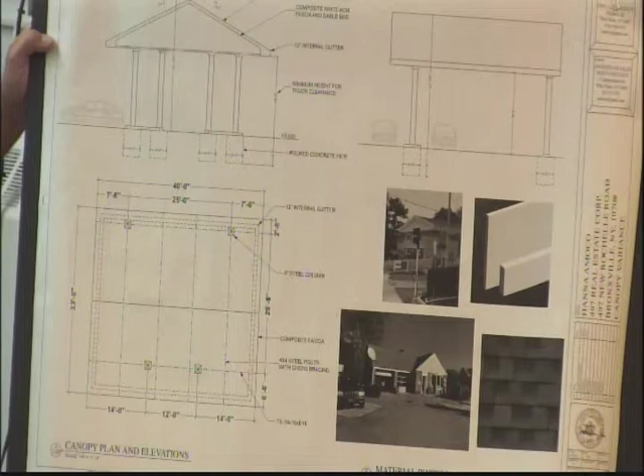Good evening, my name is Jonathan Villani, representing Annunziata Villani Design Consultants, proposing a canopy structure at the 497 New Rochelle Road Amoco Station. Very simple, two materials. I have them in color on the computer. It's asphalt shingle roof with composite white trim around the entire structure, similar to a station further down New Rochelle Road that has a canopy structure with similar materials. The asphalt shingles will match the pewter gray on the existing service station building, so we're staying in vein with the white and gray colors on the existing building.

Any questions here? I believe there's color in your packet, and I also have a computer if you want to look at the colors. In those photos there should be a photo of the other structure a couple of blocks down.

I'm familiar with this, this is actually where I get gas. The objective here is just to give some weather cover. Believe it or not, it's a big selling point because people go to the station with the cover versus the one without it; they'll go down the block instead of coming to this store if it's raining.

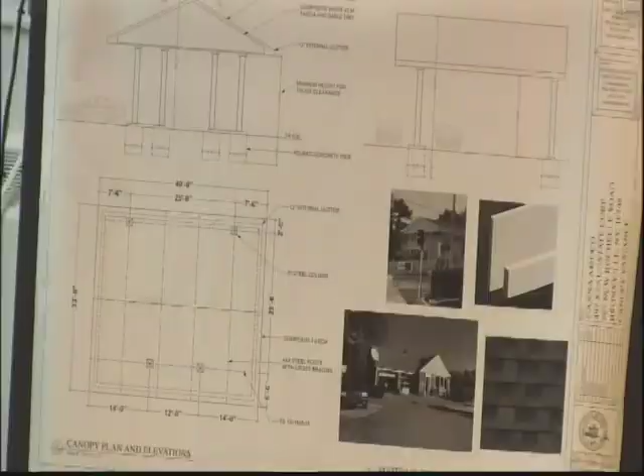Will it have lights inside? It'll have LED lights underneath, as per code, for lighting on the pumps. Does it need an Ansul system or fire protection system? Not anymore, that code is gone, there's no suppression system required under canopies now.

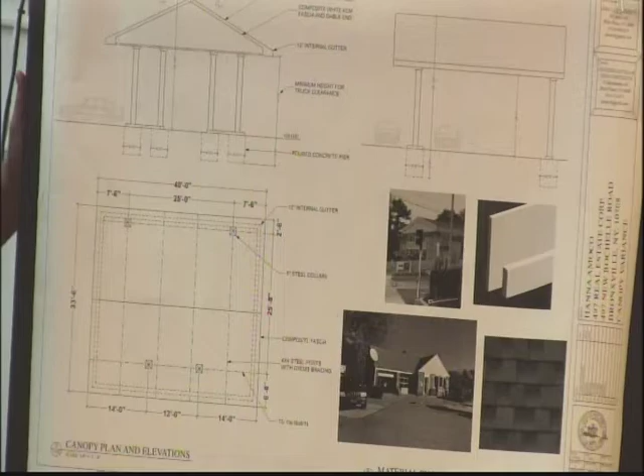And I guess the columns or stanchions, that's not going to be impeding cars pulling in, is it? No. Can you show on the site plan? Yeah, I have a site plan. So the structure is, this is the building, this is the structure out here.

These are the two existing pumps. We're limited on this side of the property due to the property line, so the cars come through here. The columns are actually hugging the building on one side and in between the pumps on the other, so there's actually a lot of clearance, though it's tight on the pedestrian side. But it's going to be out of the pedestrian walkway due to the property line, which ends at the planter, so we're not allowed to protrude past that line.

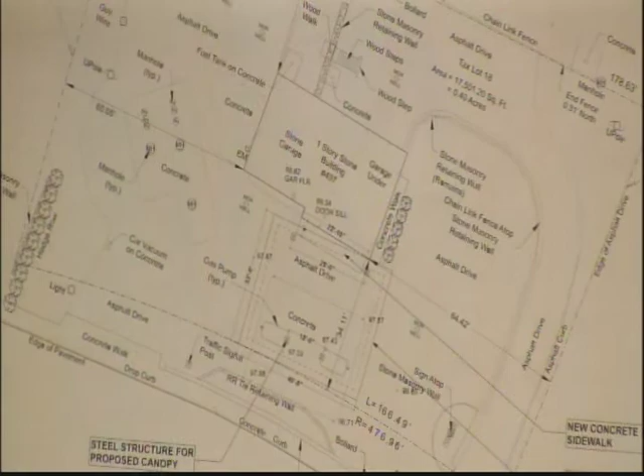So it's a big structure, what's the footprint of this thing again? It is 40 by 33, pretty substantial.

Will there be any signage on there? No signage, they have a separate signage approval for a monument sign on the property, and we don't permit signage on the canopies.

So the top of the ridge in relationship to the ridge line on the existing structure, does it exceed the existing ridge? Not by much, maybe a foot or two, but they're separated, not connected. The gable is actually going perpendicular to this gable, parallel to that gable.

Obviously the reason for the height is the minimum 14.6 clearance underneath needed for trucks, deliveries and fuel. So the pitch we left at a 5, because if you use asphalt shingles to create a residential look, you don't want to go below a 4 pitch, since shingles tend to deteriorate when the pitch is lower, and you'd have to switch to a flat roof.

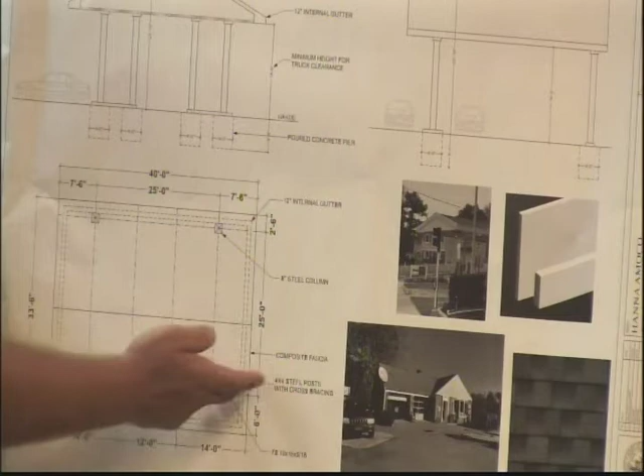And the placement of the columns, obviously, they're more spread on the ones closer to the existing structure, and yes, these ones too, on the front. Because there really is no place to put them elsewhere, since the cars and pedestrians walk here. So we hug the building with these 2 columns, and these 2 stand in between the existing pumps.

So there's actually no impeding the car traffic. Do the front ones need footings? They all need footings, yeah.

So how's that going to work, is there any concern regarding the tanks? No, I've done it on several occasions, I've also built these stations. You do a lot of hand digging, you don't really dig with a machine, you dig around the existing, and you slide them over so the footing is really a square that comes right next to the pump.

How long does something like this take, and is the station out of commission? Well, the longest wait is for the canopy. It takes about 8 weeks for the canopy, but once it gets there, everything will be prepped within a week, and then they erect it within a week. Believe me, my client doesn't want to be down for more than 2 or 3 weeks.

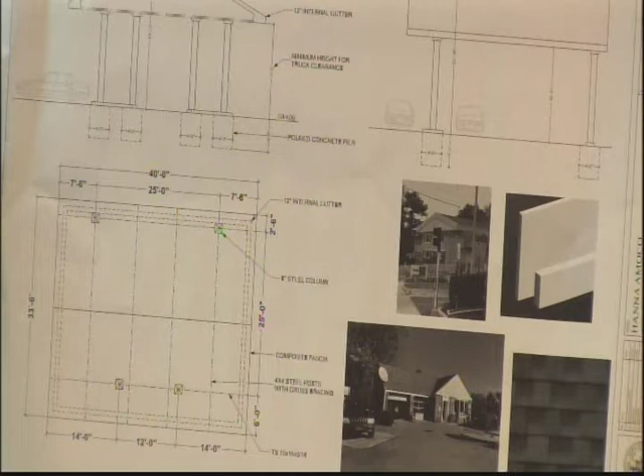Is there any sort of stormwater management, like leaders? Well, it's a totally impervious property already, so they have existing drainage on the property, and the leaders will lead to that existing drainage. Are they on this drawing? Not on the sections. They were on my construction documents, but not these 2 pages.

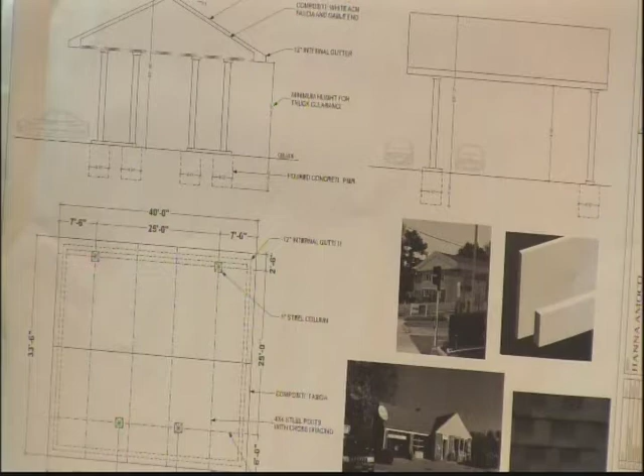Usually we do them internally, and they pop out to the bottom of the columns, so you don't see them. Well, it's probably not very good if they pop out the bottom of the columns on the pump side, right? No, they're diverted away from the pumps and the actual concrete pad because they don't want any icing.

I don't see them on these construction drawings. I could present that. I just think you want to address that when you present to the planning board.

Not a problem. I have one quick question too - I thought the code requirement was 13 feet 6 inches at the lowest. You sure it's 14'6"? Yes, every pump installer, canopy installer, uses 14'6" due to the fueling truck coming underneath. I'll double check it, but believe me, I've done it.

I know you want enough clearance, but if you could lower the height. I could check, but I don't think 13'6" is going to make it with the canopy structure people I've spoken to, and the new trucks and all that. So I have to just make sure.

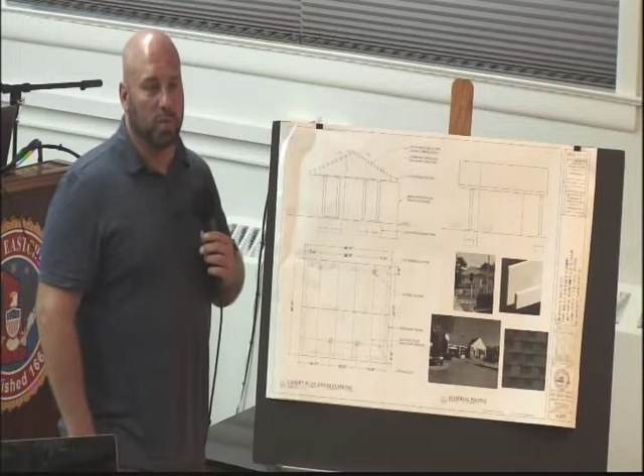You did submit some pictures of the adjacent properties, one being the Mobil station down on the other diagonal corner, right? Correct, that's just for reference. We're staying in the same vein as that. Is the pitch on your asphalt shingle similar, or is theirs a canopy? Theirs is shallower, but I was thinking, they're going to have to replace their roof within 5 to 10 years. But it won't match this.

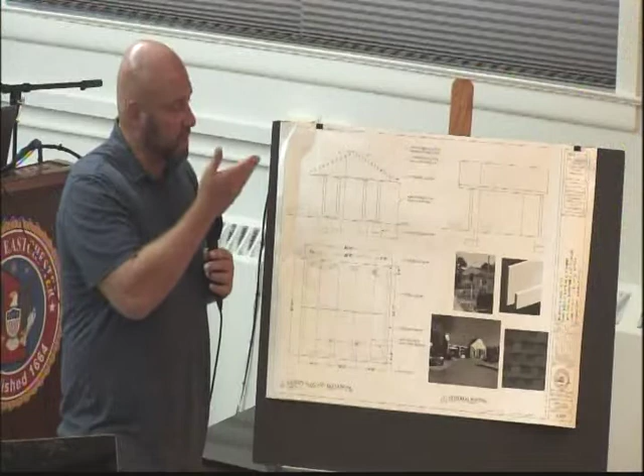Is the difference, that 1 or 2 foot difference in pitch, just a maintenance issue? Because the ridge line on the current dwelling, this thing's gonna exceed that by - no, we're willing to change the pitch to a 4. I could maybe get away with a 3, but I don't want to go to a 2 or a 1 because that's where it gets flat.

No, we're not suggesting that, we're just asking, what's the height of the ridge on the existing structure in relationship to the height of the ridge on the new one, and you answered it's a foot or 2 higher on the new one. Correct, the ridge on the existing is probably 19 to 20 feet tall. How high is the new one? 23. So it's like a 4-foot difference.

You could just scale it by the door. If the door's 7 feet, it's about 19 feet.

There's not a lot of architectural review associated with this particular application. However, I think we want to try and be as mindful as we can to make sure it's not out of scale, it's not domineering the existing structure, and there's some degree of symmetry in terms of scale and height between the existing and new building. So, do you think that's something, Sylvia, that...

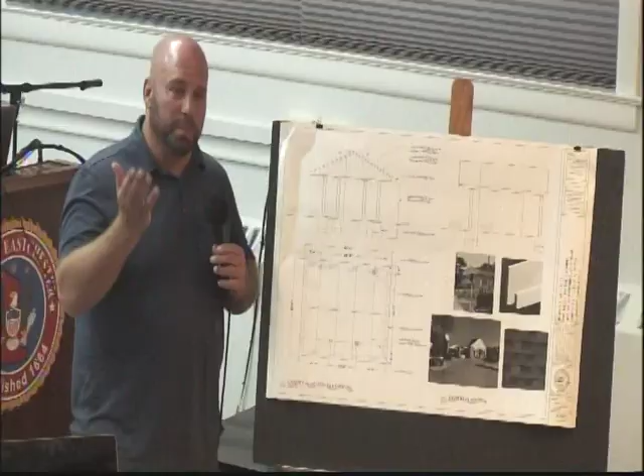I know changing the pitch to 4:12 is definitely going to help, it's going to lower that roof. What I can do is measure the ridge - it definitely has to be asphalt - there's an elevation difference also coming out to the pad. I can measure the ridge to the existing building, drag it across, and see what pitch that gives me.

Are they always asphalt shingle roofs? Is that the look factor, the look they're trying to go for, because in this area it doesn't really fit to put one of those canopies with fascia boards and then put signage on it. So the notice is that if you do a fascia board around the canopy, the actual supplier wants you to put signage on the fascia board. So when you do a canopy structure like this, you can't put signage on it. I think that was always the intention, not to put signage on the actual canopy.

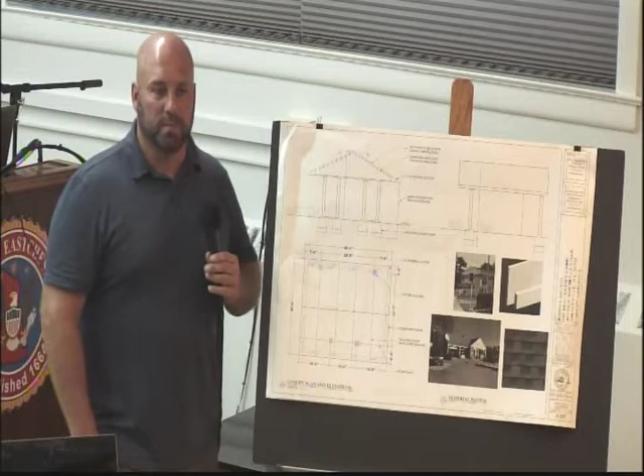I think just the general concern is that we want it to look like it fits in, and it's not an afterthought where you have this oversized, imposing structure that looks like it was an afterthought, imposing on the other building which has some degree of character—it's not this gargantuan service station. I kind of think if it was brought down a little bit, it may look more in keeping with what's there.

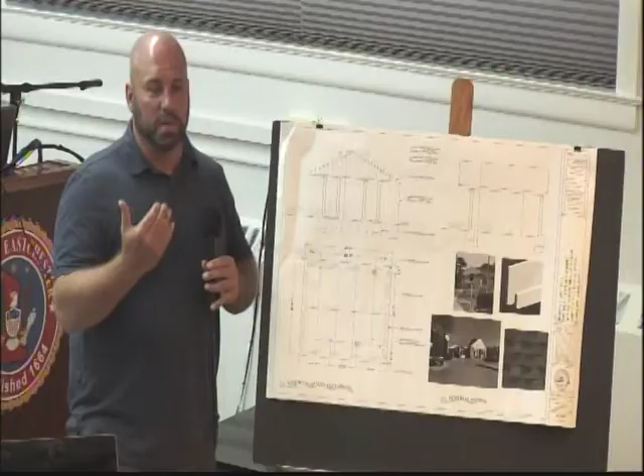Not a problem. The only restriction—like I said, I'll double check with the installers, but I'll check the height underneath. I'm pretty sure it's 14'6" clearance, and then I can match the ridge line and see where that pitch brings me to match the ridge line of the existing.

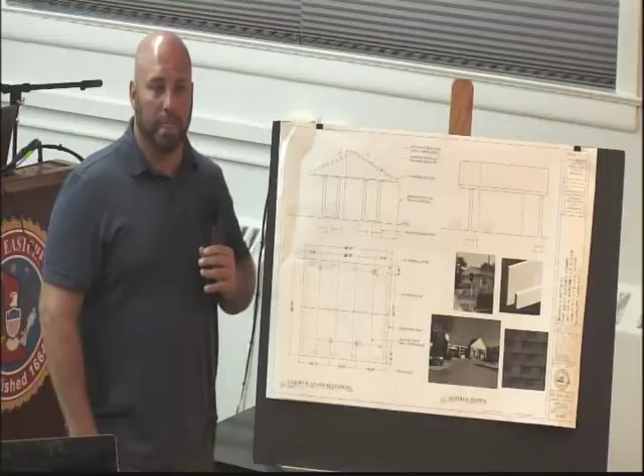Okay, you satisfied with that? Okay, all right, want to open it up and see?

I make a motion to open the public hearing on application 22-15, Amico Station. Second. Aye.

Anybody here would like to speak? Any comments? None?

I make a motion to close the public hearing on application 22-15, Amico Station. Second.

So that motion—I make a motion to refer application 22-15, Amico Station, to the planning board with a recommendation to approve as submitted with the new ridge line. So I'll read what the conditions were: when you appear before the planning board, show the leaders on the elevations and address drainage from the leaders; check the code requirement with regard to the minimum required clearance height; clarify what the height to the ridge of the existing structure is compared to the height of the proposed canopy; and consider changing the pitch, potentially to 4-12, to lower it.

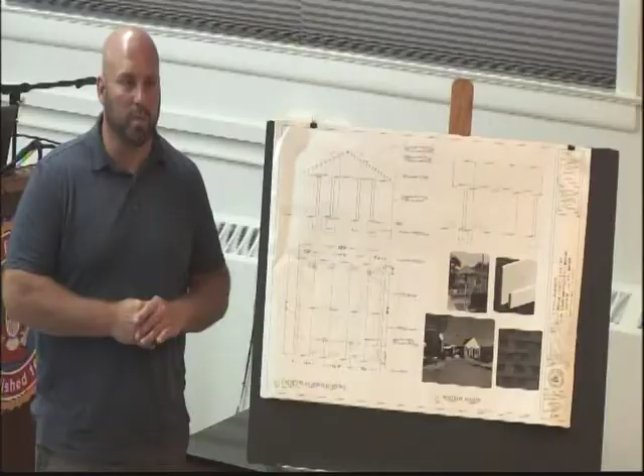Absolutely, not a problem. Okay, all right, thank you. Good luck.

Our next item of new business is item number 2, 22-31, White Plains Hospital at 750 White Plains Road.

They're going to be presenting—think I'm hooked up. Oh, smaller drawings. Okay, yes. Yeah, it's mine. There you go. It's up on the screen. I'm very bad with the microphone, so if I'm too loud or too soft, you'll let me know. You're fine so far.

Shall I start? Sure. My name is Jim Case. I'm a principal with CannonDesign Architecture, and with me is Daniel Schmidt, a project architect with our firm. We've been retained by White Plains Hospital to design an ambulatory outpatient facility at what was the Lord and Taylor building in Eastchester. We submitted a bunch of drawings which you probably have copies of, more than you need, so I'll focus on what I think you want to see, but stop me if you want me to talk about something else.

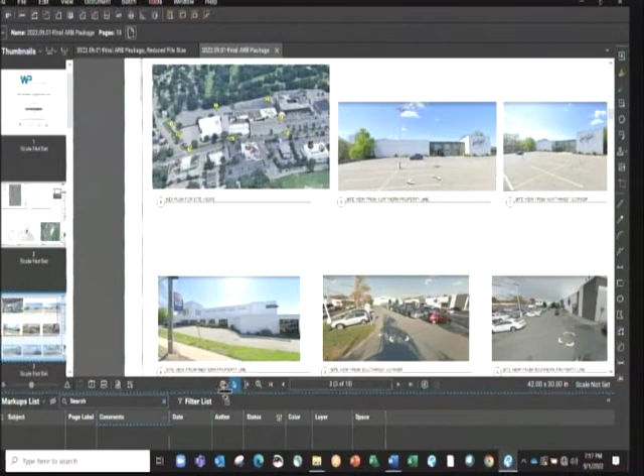Okay, so I'm going to skip over to here and zoom in, just to orient everybody. This is the portion of the building we're talking about, and this is the north entrance here that exists today, and there's an east entrance on the lower parking lot. There are two parking lots—this one is higher, and this one over here, if you can see my pointer, is lower.

Our space is approximately 50,000 square feet on the main level here, which is accessed directly off of this higher parking lot. We'll also have access from a vestibule on the lower parking lot, which will have a stair and elevator that will take patients up to the main level.

Now I'm going to show you the main—there are really three interventions to the facade of this building that are taking place. One, the landlord is already in process of doing under a separate application—he's adding some windows to the facade of the building, you've probably seen that. The two that we're doing are at the entrance here at the north—maybe this arrow looks better here—and at the vestibule on the east side. I'll home in on that for a second.

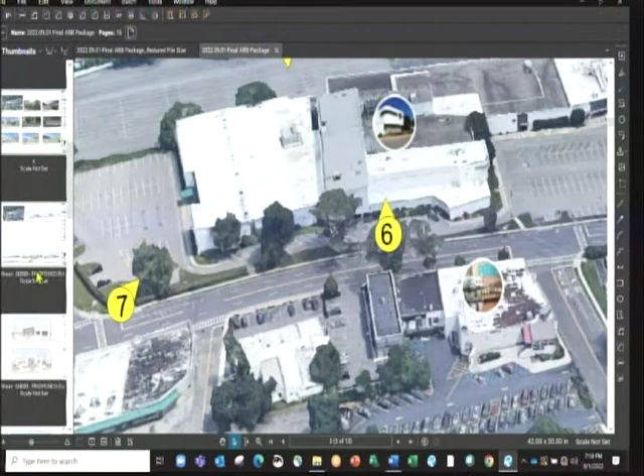Give me a second. Sorry, I wanted to show you one more thing on this drawing.

This is the north entrance off the higher parking lot as it exists today. We're proposing to remove the stone and glass and replace it with new glass in the exact same plane as what's there now. We're not changing the footprint or increasing the size of the building, just replacing it with more glass since this will be our main entrance and access to waiting areas, to get more natural light into the space.

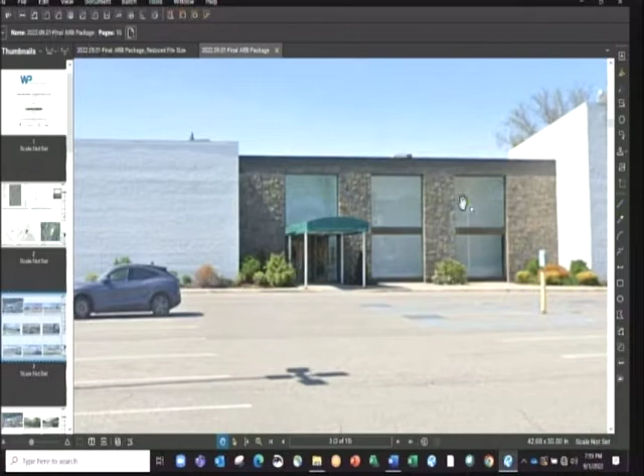We're also going to add a kind of crisp canopy to this, which I'll show you a rendering of in a minute, that will go to the same height as this part of the building, not the higher part, but the main part.

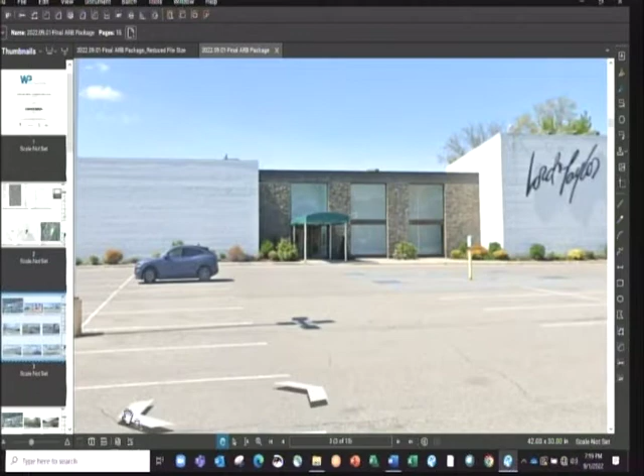The other entrance, the vestibule, can be seen in this photograph. There's an existing vestibule on the lower parking lot on the east side. It's a little blurry here, but it's a glass vestibule with a flat roof right here. We're proposing to take that down and put in a new taller vestibule in the same location, same footprint, not expanding the building's footprint, but giving it more height so we can add a sort of monumental decorative stair on the inside to go up to the main level, plus an elevator.

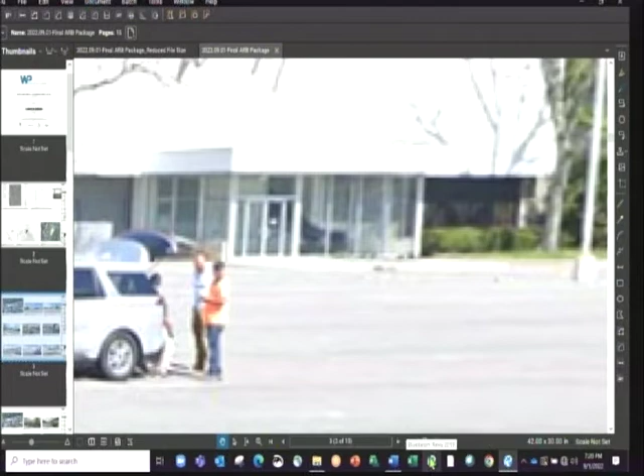There are escalators there now that we're going to remove and close up, putting in an elevator instead for patient access to the main floor. So let me show you what those will look like, we think.

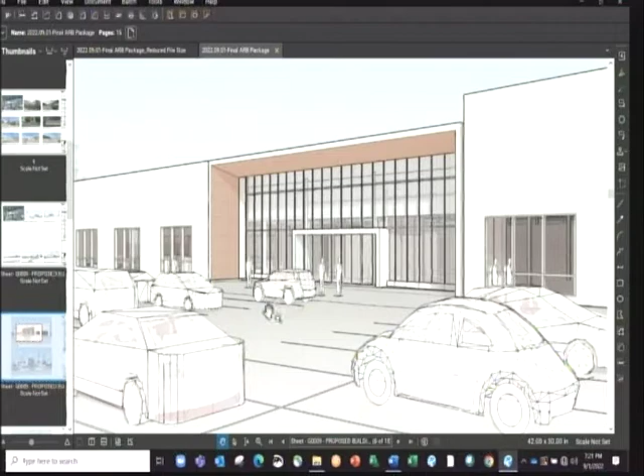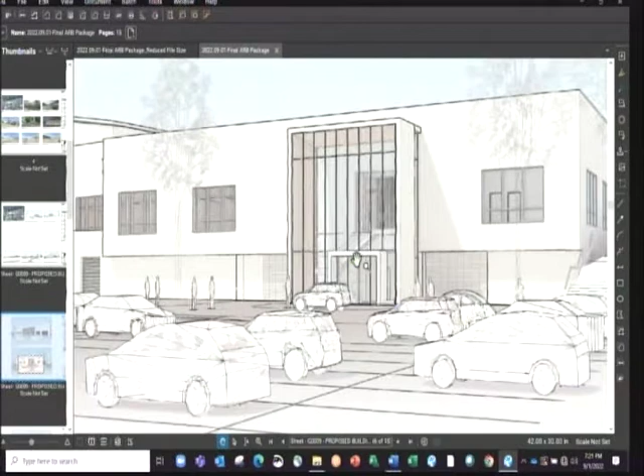Inside, we're going to have that same wood-like material, but it'll be within the structure, not on the outside like it is at the other entrance.

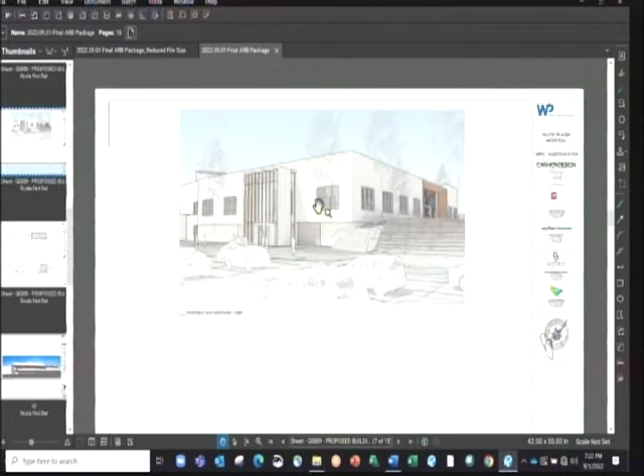This next rendering shows both of the entrances from one angle, the taller vestibule and the canopy piece we're doing at the other entrance. There's a stairway being put in that doesn't exist now, by the landlord—that's not part of our work.

Any questions so far? How will it be illuminated—from the inside? The parking lot itself will have illumination like it has now, and we're not involved in that part; that would be the landlord. We haven't, to be honest, finished designing the lighting for this, so your feedback is perfect timing. At other hospital and outpatient projects, we've sometimes used dimmable LED lighting so it can be adjusted if there's an issue. We haven't designed it yet, but it'll be lit from the inside. There will be lights, we think, in this canopy on the outside to illuminate the area immediately below, but not illuminating out to neighbors.

My next question is about signage.

I knew you were going to ask that, because there's no signage shown right now, and that's for a reason - it hasn't been designed yet. We understand that's a separate application, so at a separate point, the hospital will come in with the signage they're proposing, and that'll be discussed. I'm sure there'll be some signage on the outside of the building, but how large and what kind, we haven't gone there yet.

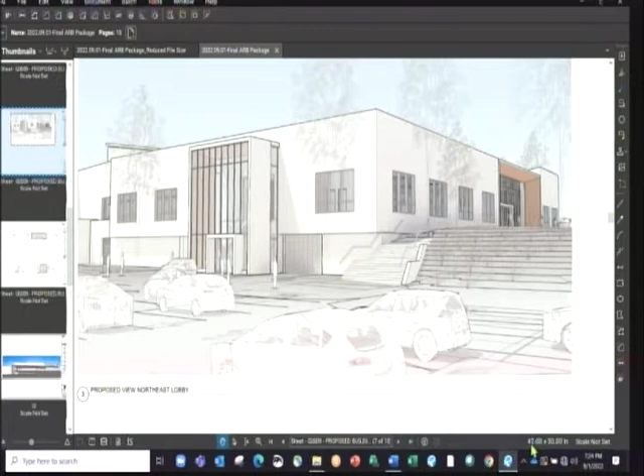Any other questions? I had a question I mentioned previously about roof-mounted equipment. There is a roof-mounted unit now that exists that's going to be removed, possibly - we may reuse it, we may not. Up until recently, we were proposing 3 new additional units on the roof, air handling units, to handle the airflow and filtration we need for a medical space.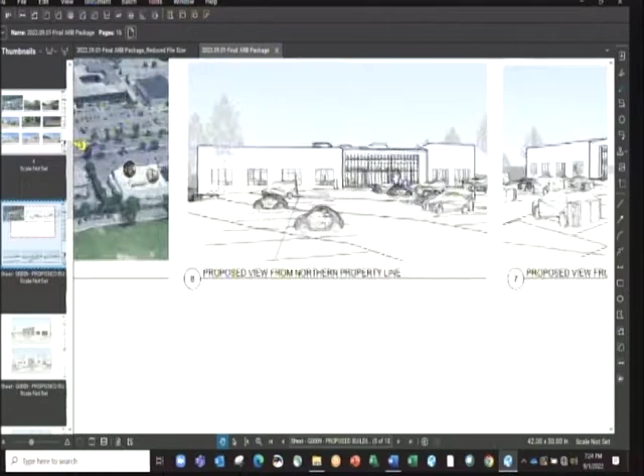We've done a couple of drawings to see what the impact of those would be visually. They're in the set that you have - let me find it for you. From a few views, you can see the 3 new units poking up a little bit, like in this view. From other views, you can't because it's blocked by the perspective and where you're standing. So in this view you don't really see them, but on this more head-on view, closer in, you do.

Now those units are up on dunnage, so they're high. We're looking now to use 4 units that are smaller, on curbs, which will, if not completely eliminate, certainly reduce this down to near zero what you would see from most angles.

Does the building have a parapet right now? It has a partial parapet. That right side of the building we're looking at over here has a fairly high parapet, then there's gravel stops right where our entrance is going to be, and then to the left of that there's like 6-inch curbs, so it's kind of up and down with the height of what's happening.

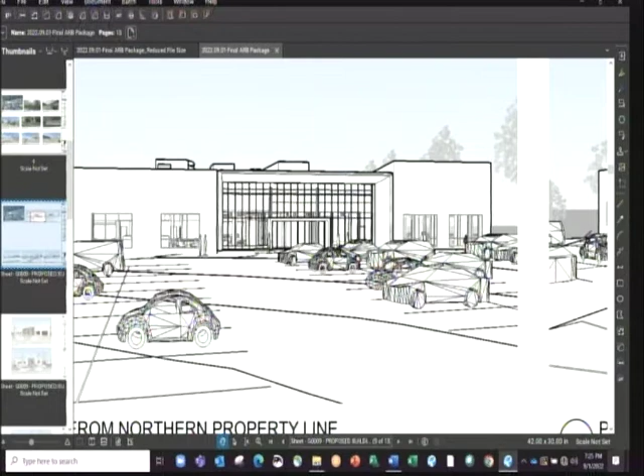Unfortunately, we need to have rooftop units for air handling, but we've moved them back as far as we can, so you will see them in some views and not in others, from what we've drawn here, and they're on your drawings as well. We're looking at possibly hiding one of them behind that higher parapet area, which is over 5 feet - so over here you see a little bit as well.

And you won't need any kind of additional bump out on the roof for the new elevator, right? That's perfectly within - it's going to be enclosed with it. It's a small, it's only a 2-stop elevator, and our height is so high, we have very high ceilings, so that's going to be within the space.

What do you think? Straightforward.

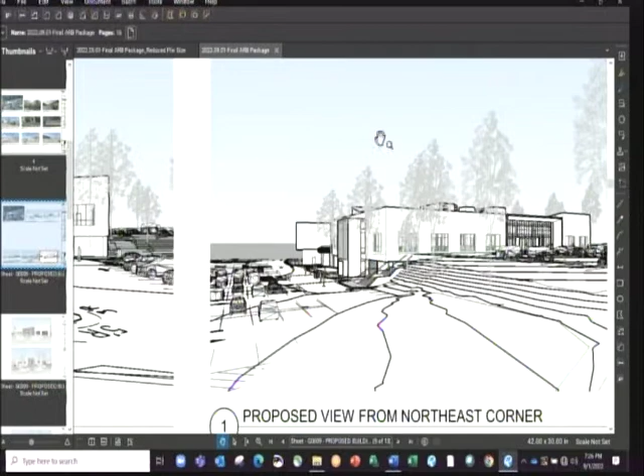We do have some materials if you'd like to see. Sure, we'd like to see that. Put this one back.

The base building windows have black mullions, so we're going to match that with a curtain wall - this is just a matte black. On the east side we have clear glass, which is nice. On the north side, we're going to white dot frit it 30%, just to hide some structure you can possibly see through the curtain wall since it's a certain height, and also for possible sun shading. This is just an example, like this one is a little bit more dense than 30%.

And our white metal panel for the outside - that's just for color, correct? The white metal panel, that's going where - that's the outside of the frame. Oh, the frame, yeah, right.

Will the frame be aluminum like this? We're going to do an ACM panel, or like a flat plate, to avoid some insulation issues, but it's going to be an aluminum panel. It's going to be a little bit thicker than that - the gauge here is not accurate. If a kid, like my son, throws a baseball at this, it's going to be... And this is the wood? The wood look, yeah - most likely keep your son away from our building.

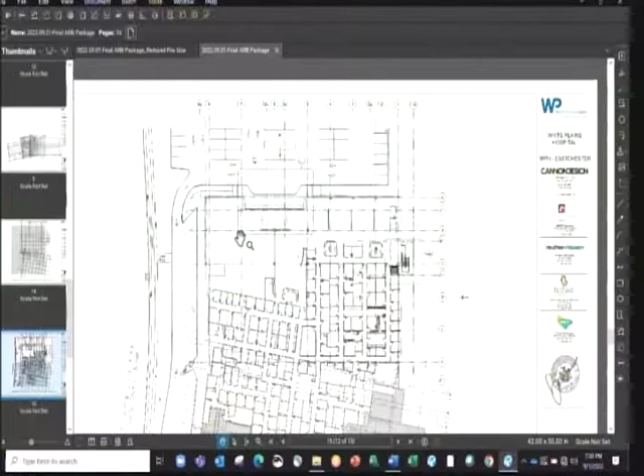I just have one question on the interior layout. I saw one drawing that was just a mass of, I guess, examination rooms. Is that right? Let me explain that - it's interesting, actually, because it's something that's talked about a lot. Let me see if I have that. You're talking about this drawing here, I think, which is in your set.

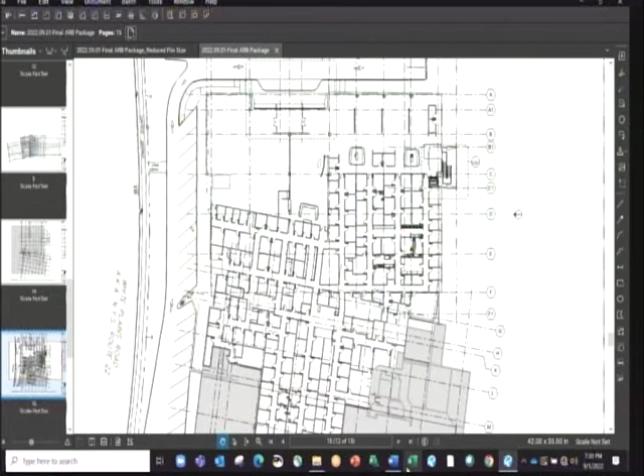This is the lobby - the shape of the lobby is changing as we're still working out the interior layout. But there are a number of specialty practices moving in here: dermatology, allergy, orthopedics - about 8 or 9 different specialties. Each one will have a grouping or number of exam rooms they need for their practice.

But on some days there'll be more of one, less of another, so they're going to flex. So the idea is to build a flexible grid of exam rooms and corridors connecting them so the hospital's program can flex and change over time. The basic module - in this case the exam room - is designed to adapt and service almost any of these specialties. A few are slightly different because of equipment needs, but most can serve any specialty.

So there'll be more than one check-in area when you walk in. You won't be walking into one big space - you'll walk to a reception, check-in, and then be directed to where you need to go in the facility. It's still being worked out because the specialties are still a bit in flux. So it looks on paper like a lot of stuff, and it is, but it's going to be operationally and organizationally pretty well thought out, hopefully running smoothly.

And the idea operationally is to minimize the amount of waiting time patients have. Part of that is a function of the quantity of rooms you have and the ability to keep people moving.

So I guess as part of that design, you need to know what the usage is, and again, looking at the density of office space - does that dictate the amount of additional tonnage of AC that's required? Is that driving the larger scale air conditioning requirement, i.e. the bigger unit on the roof?

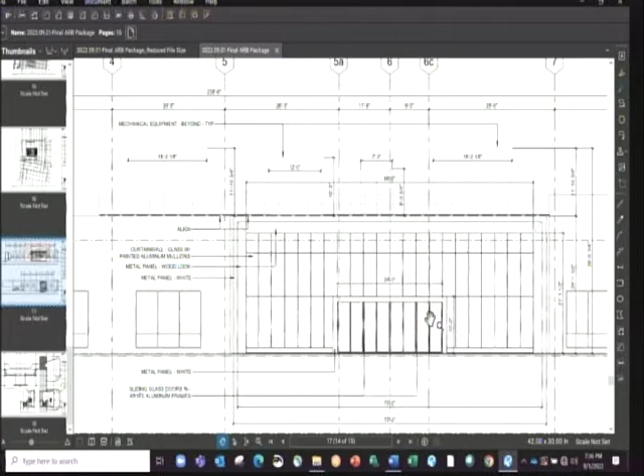We do have dimensions of the units as they were several weeks ago, but they're coming down in height from what we're showing here. The drawings I showed you before, with the perspectives where you see them poking up, were based on this set of units. We're bringing this down. I don't have the exact size yet of the smaller units and on curbs. These are larger units up on roof dunnage, tonnage, so it will be less than this.

I don't have the exact dimensions yet because it's still being designed. The information in terms of what was submitted with these drawings is here regarding the sizes, but we're in process of lowering that—not out of any commentary, just out of a desire to be more flexible with the units.

It's a little fluid, but I can tell you that because we do a lot of healthcare work, we're aware that the lower we can keep these and the further back, the less impact, and that's what we're trying to do. It will be better than what we're showing here.

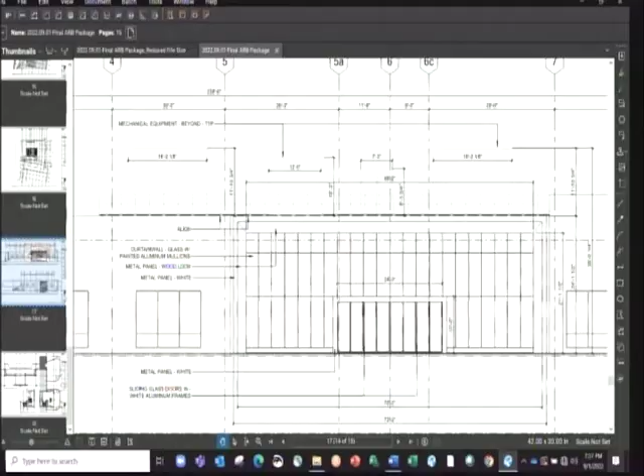I'm going to make a motion to open the public hearing on application 22-31, White Plains Hospital. Is there anyone here with questions? No? Okay.

I make a motion to close the public hearing on application 22-31, White Plains Hospital. Second.

I make a motion to refer application 22-31, White Plains Hospital to the planning board. I think the one or two conditions or comments were what we just spoke about: providing more specific information regarding the roof-mounted equipment and trying to minimize views of those to the maximum extent possible. The planning board will be concerned about that as well. Also, to reiterate what I already discussed with the applicant, we should minimize the impact of any proposed lighting within those entranceways.

Great, thank you. Very good. Good luck. Thanks.

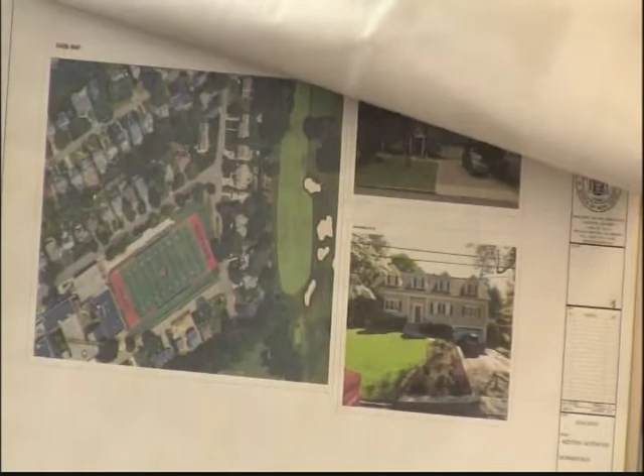We also included a slew of additional renders for tonight that are larger to look at. Jada, would you help me? I don't have enough hands.

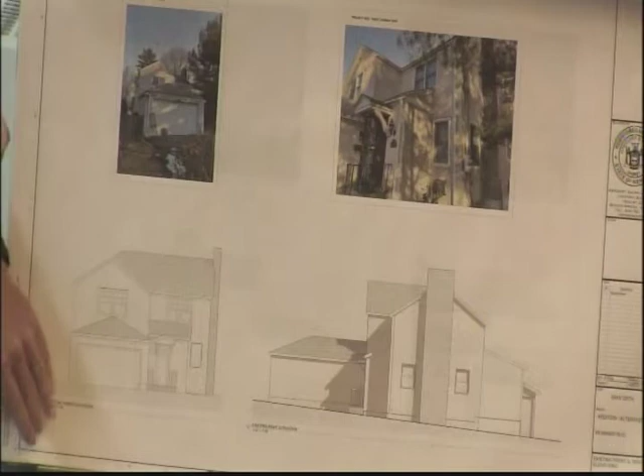Okay, so existing two-story dwelling there. It's stucco finish pretty much all around, with an asphalt shingle roof. You can see from the photographs we submitted that it's not in the best of repair and maintenance throughout. The primary dominant feature on the existing facade is this two-car garage door and that hip roof elevation, with the actual architecture kind of tucked back from it. The entry itself is also, as you see in this photograph, kind of obscured from view as you come down the road. On the rear, which isn't the primary focus but is still relevant, we refer to it in the application materials as somewhat of an orphaned addition and space on the back.

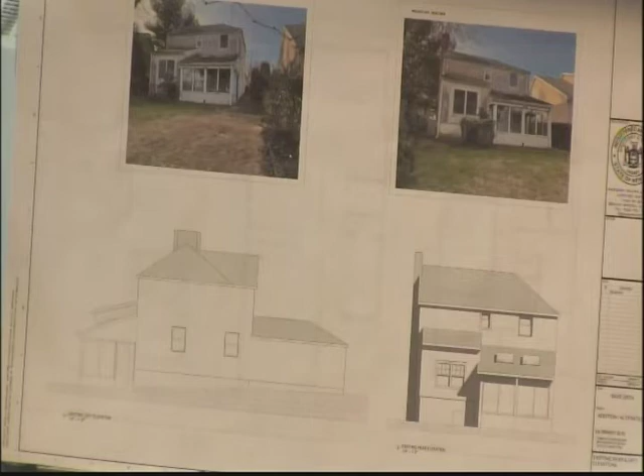So the task we received, in addition to the plans, was to help reconcile the massing of the home, make it make sense, introduce some order and symmetry to it, and improve the streetscape. If we go to the elevation page, this is ARB-1.

Mr. Orth is a general fan of that farmhouse or modern farmhouse style. So we pulled forward the second floor over the garage, and we would propose swapping out the garage door to something that has a little more scale to it—more human scale, more pedestrian—instead of just that very plain overhead door. More attractive there, and then working pretty hard to define three axes: a vertical axis with the garage door and double windows in the bedroom above with a secondary ridgeline; an axis at the center of the home with the primary ridgeline; and an axis for the new porch we pulled forward, with another bedroom above with double windows. We also expand and maintain a chimney element massing on the side of the dwelling. That's about it on the front.

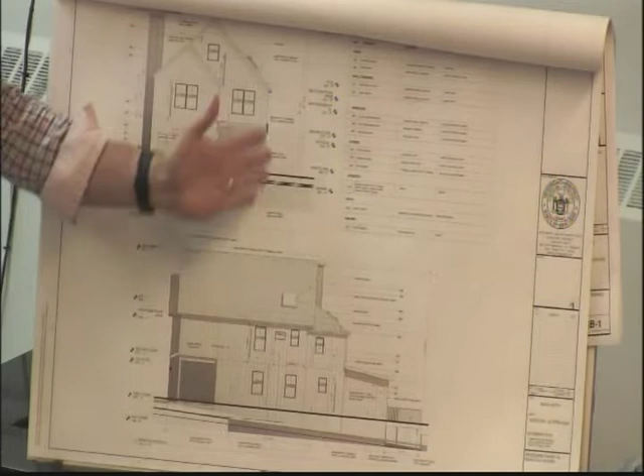I won't go around unless you'd like. We'd like to, yes—go around the sides? Okay. So on the side elevations, generally we're trying to maintain a series of order, reconciling the lines of the home as we go. This is the inset of the porch that leads to the entryway.

And then the rear of the home was quite reconciled from the existing condition. We squared off that massing on the rear with a one-story roof, and then you have the second floor above it, which then steps back to the attic that is up above with that primary roof line. There is a deck that we're proposing on the rear.

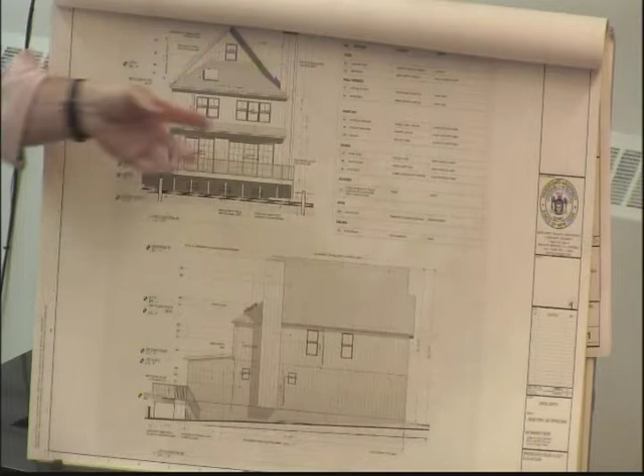This sheet has the list of materials, which I'll talk about in the elevations. Generally speaking, it's a lot of more maintenance-free materials, with Hardie cement board and batten wrapping the house, redone stucco around the foundation that would match color, and we're proposing asphalt shingle roof all around on the roof lines. The decking itself would be a maintenance-free Trex or other style deck material.

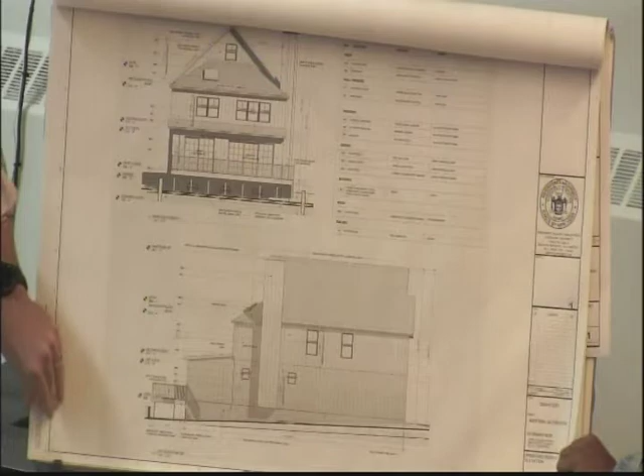And then the other side elevation is, again, just relatively reconciled massing, with some limited windows based on programmatic elements on the interior. And then we modified the renderings a bit from what you had and just made them larger for visibility.

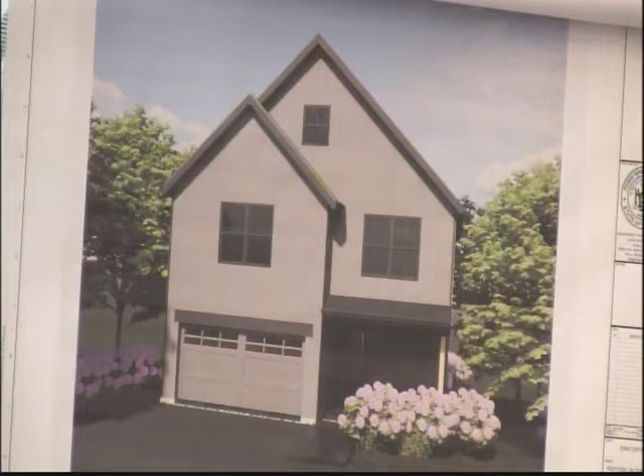The real change was just to try to show it with less shadow. I know the ones we submitted were a little bit dark, and that wasn't exactly doing justice to the intended color, which is like a charcoal. When it's in the sun, I think the renders you had read a little bit brown and really washed out.

So general color palette would be that charcoal for the siding. The trim and the windows would be black. The asphalt shingle would be black.

And then we've been playing with cedar accents. Even in preparation for this, we were looking at other places to incorporate that cedar accent, whether that's the header over the garage door or headers over the windows. We were just thinking about ways to bring a little bit more warmth into the elevation with that cedar element. But again, generally speaking, it's charcoal and black.

And the window series currently we have specified as Marvin, which is a pretty solid, well-known brand.

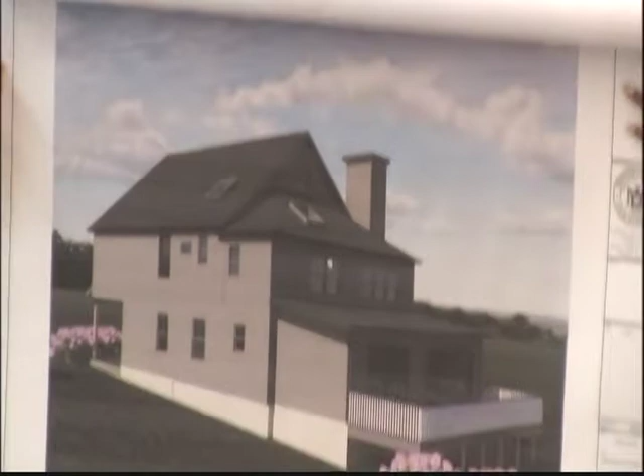Do you have any material samples? Unfortunately, we did not bring any materials. It's a vertical board and batten. What's Hardie? It's a vertical Hardie board and batten, correct.

You really don't read it in the rendering. You would definitely see the shadow lines in person though. That's fair. Every, whatever, 12 inches, 18 inches? It's about 12 to 18 inches, correct. I think we're going a little wider with the 18 inch, but yes.

So these are similar views to what you have in your packet, they're just enlarged. Your asphalt roof in the back, the pitch is way too shallow for asphalt shingle. This roof? It's like a 2-12 maybe. Yeah, I have the roof plan because I knew the pitches would come up.

That's not even a 3 for sure. Do you have enough room to raise the back under the window? Yeah, we do. I was looking at the window lines here, let me just look at it.

A lot of people, when they have limited pitch, they'll do a standing seam instead. I don't know how you feel about it, changing the material there. Most farmhouse-style homes that are built are getting standing seam everywhere, they all have standing seam.

We've been working on this for a while, so I've sort of forgotten some of the elements, but that was a focus area in like February, March, to make sure that the pitch was okay for asphalt. I understand your concern, I agree with it, but this was a focus item before, and I don't have an issue with it, we have the room to raise it anyway.

I think the question is the standing seam metal roof, we could do it, it's just going to cost more money. We have standing seam in the front, on the front porch. On the front porch? Also, this is a house for me, but I am a builder, part-time builder on the side.

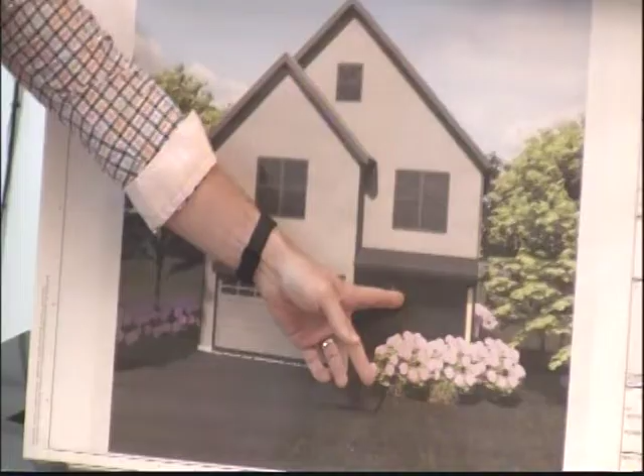That roof over the entryway is a standing seam roof? This roof would be a standing seam roof, yes. I misspoke before, and I don't see any leaders on the rendering.

Are they there? Yes, there's actually a relatively extensive Cultec system that we went through engineering with, for both the roof leaders and the footing drains, all feeding into Cultec.

The garage door is what material? The garage door, what material? Do you know the brand? Aluminum?

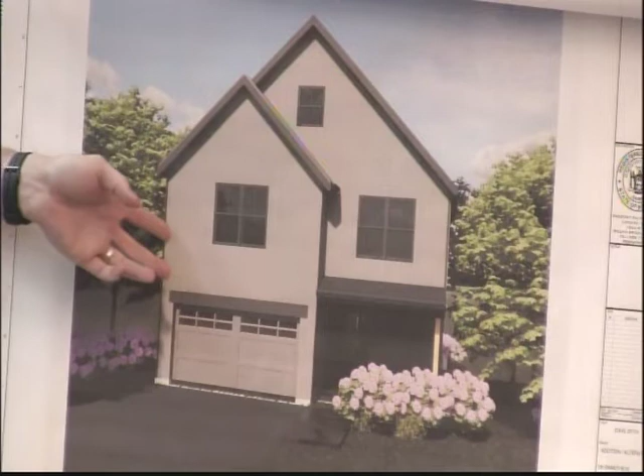I think your point is well taken, that if we're referred to the planning board, we would add the shadow line to the renders and add some of those accents, just to clarify. It's going to read, the house is going to read vertical. It'll help it to read vertical once you do the shadow line.

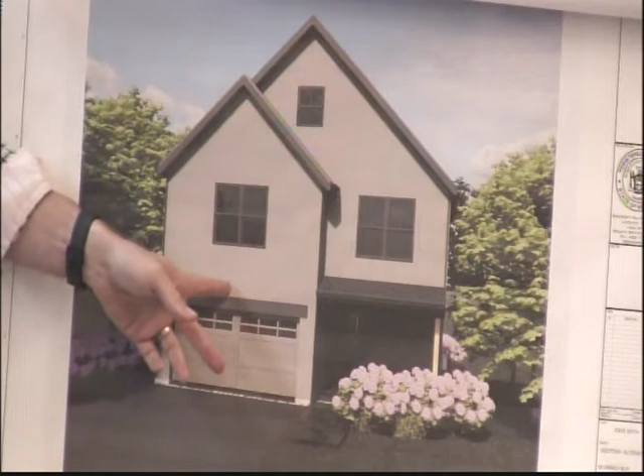I'm just looking where the lights are going to be, underneath in the entryway, and will you have anything on the garage? We had proposed one central carriage-style fixture here, which similarly I can have an actual cut sheet for the planning board.

Not the board, not the board? In the drawing we have, we had shown the batten width style of trim, just to keep everything very clean, even the corners. I'm just going by your elevation. What's that? The elevation doesn't show any trim around the window, it shows the roof over the porch to be asphalt, not standing seam.

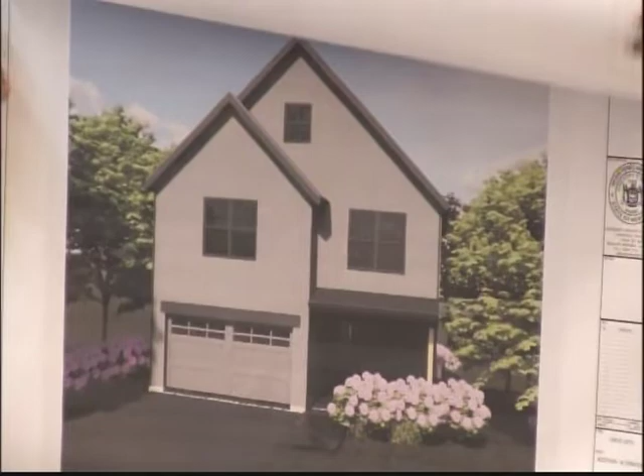The actual elevation drawing, right? Are you doing simulated divided light on the windows? Sorry, what's that? The SDLs? It's SDLs, gonna be a grill inside and outside, not a—correct.

I do have questions about the front entryway again. It's going to be an asphalt driveway, and it looks like you have a little pathway to your entrance. What material will that be? That's gonna be a combination of porcelain tile that looks like bluestone, but it's a little hardier, and it's gonna have bluestone trim around the outside.

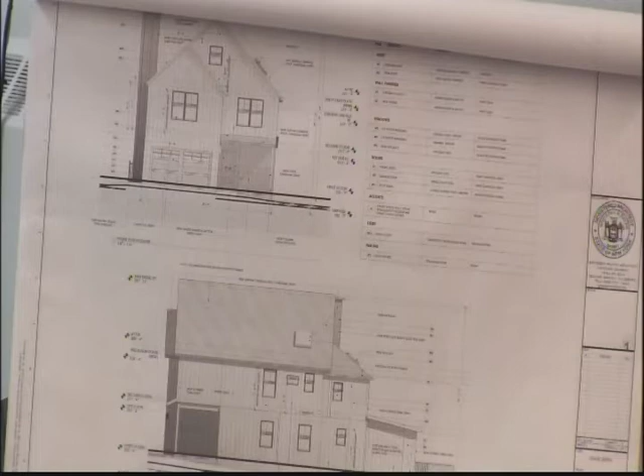We really need to see the samples. It's hard to visualize and guess when we don't really have the samples of the facade colors, the roof color, and this additional material, to see them all together and determine how it's all going to mesh together. And the lighting.

You've said you've kind of done this before, figured out the prototype. Is this the same finishes? The only difference between the one on Murray Ave that we did in Mamaroneck and this one is the color of the board and batten. That one was white, but everything else about it, the bluestone material, the light fixtures, the window color, everything else about it was this. And then Dave was interested in pursuing the charcoal siding.

If there's that many similarities other than the color, I think that information would certainly help your case in conveying it to us and our colleagues on the planning board as we move forward. This is what it is, there's really no mystery here. We're just looking to make sure it fits in, and we definitely apologize on the samples - that was just a miss on our end. I don't know the best way to rectify that, we just need to pull them together. It's not the end of the world, but if you've done this and a lot of these details have already been designed and executed...

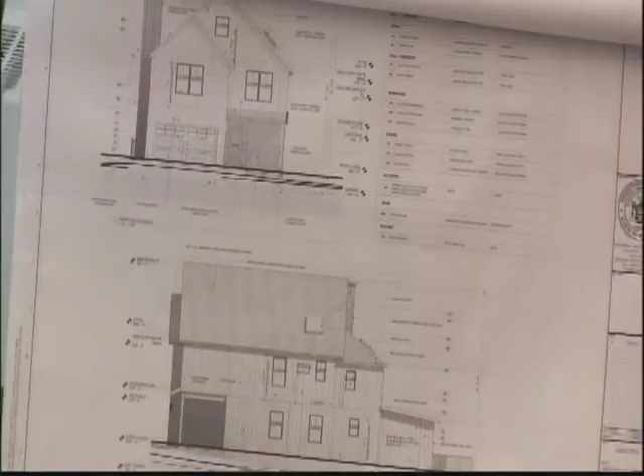Alright, any other comments? Air conditioning equipment, has that been located? We're zeroing in on it - it's not on the plot plan, but we can locate that also. Let's go to - it's all electric, heat pump.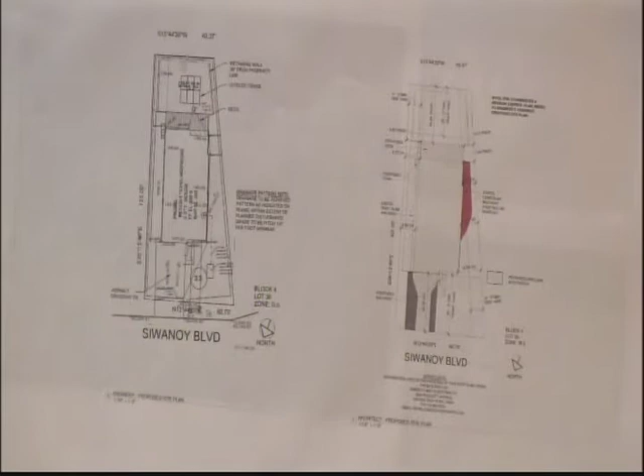It's highly efficient, like a mini split style? No, not exactly - I know what that looks like, the terminology. It's a water source heat pump, all ducted heat pump. They're interested in the condenser unit, where it would be and how many there would be - what will be outside, what will be in the side yard is the question.

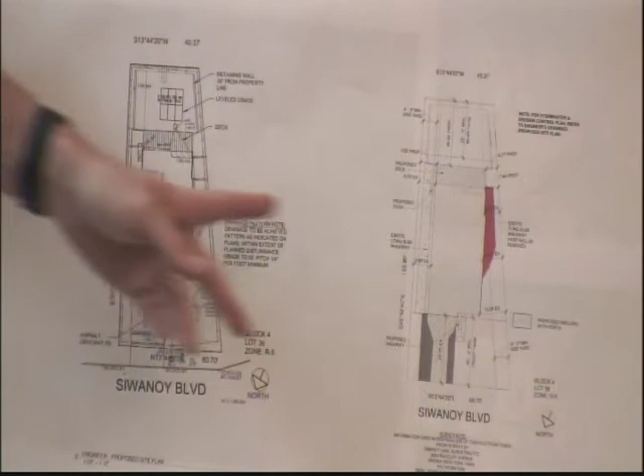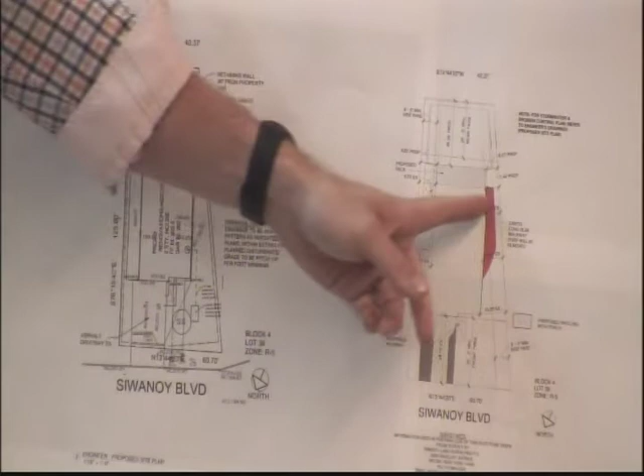It would be where the existing unit is, on the southeast corner - right here, in the back, along the back side of the building. And Margaret, this didn't need a landscape plan, right? No. Okay.

I'm going to make a motion to open this to the public hearing, application 22-32, 106 Siwanoy Boulevard. Second. Okay, and I'm going to make a motion to close the public hearing on application 22-32, 106 Simonoi Boulevard.

Okay, so we're going to move this along to the planning board. I make a motion to refer application 22-32, 106 Siwanoy Boulevard to the planning board with the following recommendations: make sure you're very clear about proposed materials, colors, finishes, bring samples and catalog cut sheets.

Also, reevaluate the pitch on the roof on that rear elevation, and clarify whether you're going to modify the pitch, keep the asphalt shingles, or use a standing seam roof. You were okay with the chimney being the same material? That's their personal preference.

I actually have a question on the chimney now that I'm looking at it - what's inside that, a wood-burning fireplace? Yes. And that's gonna remain? No, I'm sorry, it'll be a new wood-burning fireplace, it's proposed. So it requires a flue all the way out.